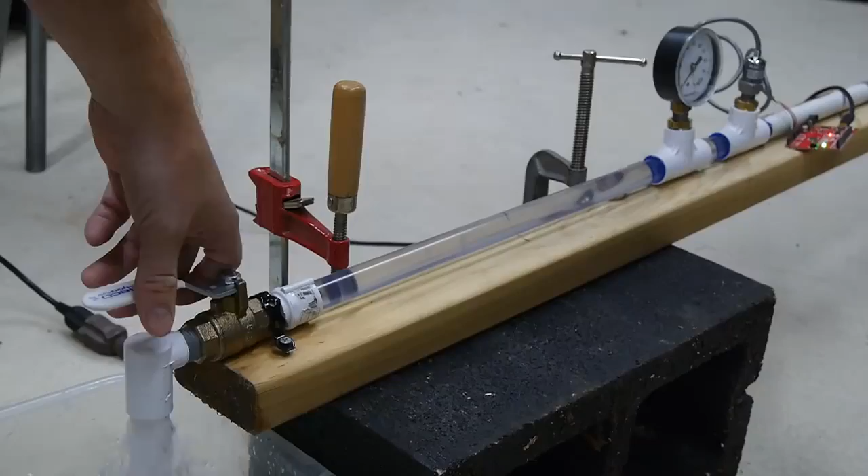It's easy to forget how heavy water is since we hardly ever carry more than a few ounces at a time. But if you add up all the water in the pipelines of your city, or even just the pipes in your house, it makes up quite a bit of mass. And when all that water is moving through a pipe, it has quite a bit of momentum.

If you suddenly stop that movement, for example by quickly closing a valve, all that momentum has nowhere to go. Since water isn't compressible or springy, it can't soften the blow. You might as well be slamming concrete into the back of the valve and the walls of your pipe. Instead of being absorbed, that sudden change in momentum creates a spike in pressure that travels as a shockwave through the pipe.

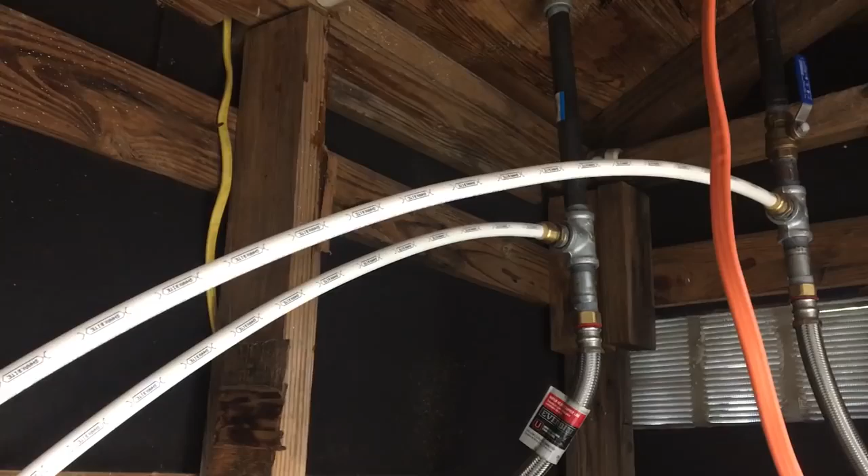Sometimes you'll even hear this shockwave as banging in your walls when you close a faucet or run the washing machine, hence the superhero-esque nickname, water hammer. Banging pipes inside your walls can sound a bit spooky, but for large diameter pipelines that can be hundreds of kilometers long, that surge in pressure from a change in momentum can cause major damage.

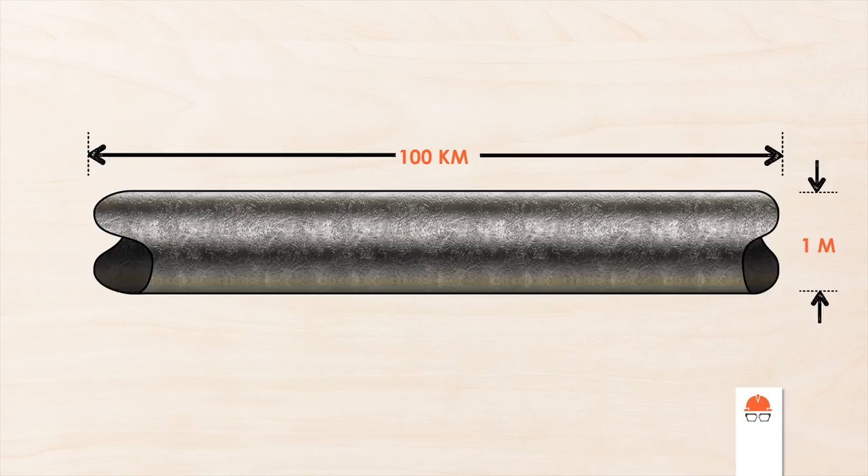Let's do a quick calculation. If you have a pipeline carrying water that is 1 meter in diameter and runs for 100 kilometers, a fairly average sized pipeline, the mass of water in the pipe is about 80 million kilograms. That's a lot of kilograms. In fact, it's the equivalent of about 10 freight trains.

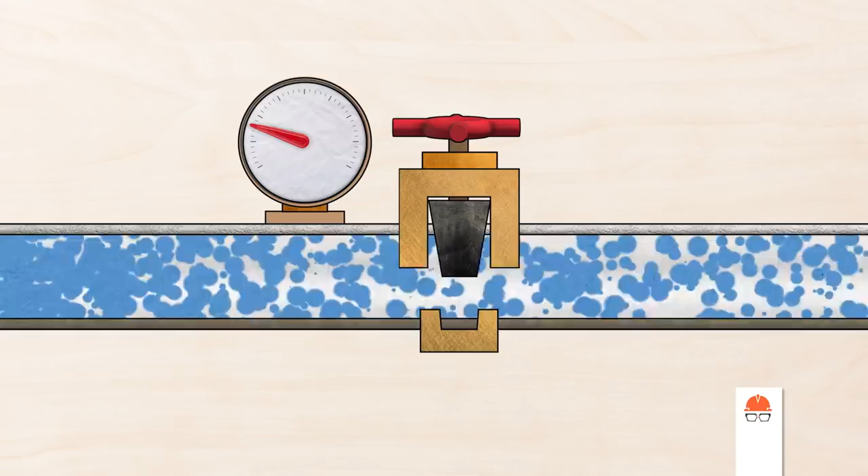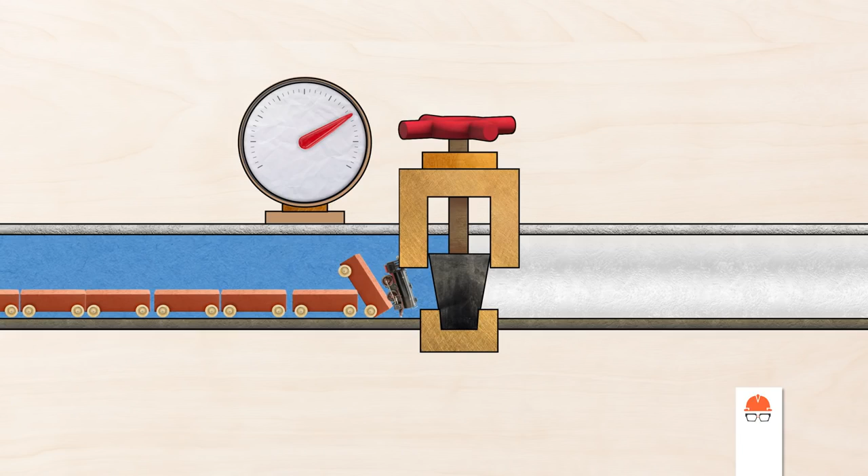Imagine you're an operator at the end of this pipeline in charge of closing a valve. If you close it quickly, you've essentially slammed those trains into a brick wall, and the pressure spike that results from such a sudden change in momentum can rupture the pipe or cause serious damage to other parts of the system. There's actually another term for when a large spike in pressure ruptures a sealed container, a bomb. And water hammer can be equally as dangerous.

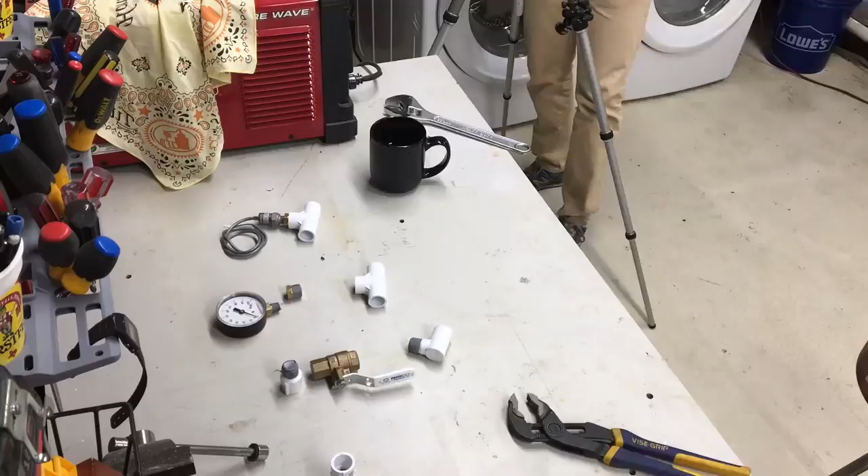So how do engineers design pipe systems to avoid this condition? Let's build a model pipeline and find out. Here's my setup. I've got about 100 feet or 30 meters of PVC pipe connected to the water on one end and a valve on the other. I also have an analog and digital gauge so we can see how the pressure changes, and a clear section of pipe in case anything exciting happens in there. I mean civil engineering exciting, not like actual exciting.

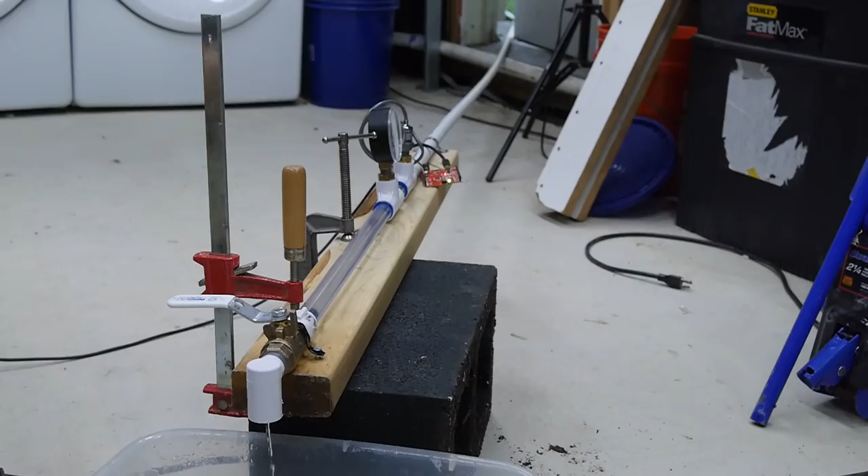Watch what happens when I close this valve. It doesn't look like much from the outside, but look at the data from the pressure gauge. The pressure spikes to over 2,000 kilopascals, or about 300 psi. That's 5 times the static water pressure. It's not enough to break the pipe, but way more than enough to break this pressure gauge.

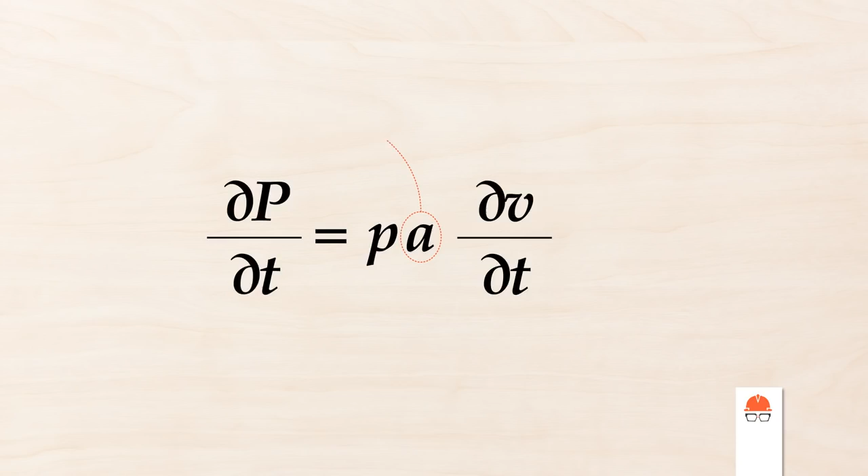We're not going to do any calculus here, but the terms of this equation show the parameters that can be adjusted to dial back these damaging forces. And the first one is obvious. It's the speed at which the fluid is moving through the pipe. Reducing this is one of the simplest ways to reduce the effect of water hammer.

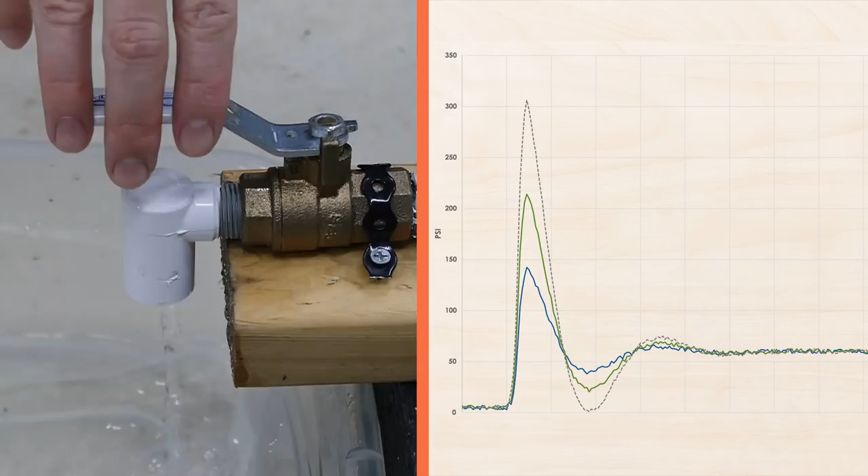Velocity is a function of the flow rate and the size of the pipe. If you're designing a pipeline, the flow rate might be fixed so you can increase the size of your pipe to reduce the velocity. A smaller pipe may be less expensive, but the flow velocity will be higher, which may cause issues with water hammer. In this case, my pipe size is fixed, but I can reduce the flow rate to limit the velocity. Each time I reduce the velocity and close the valve, the resulting spike in pressure decreases.

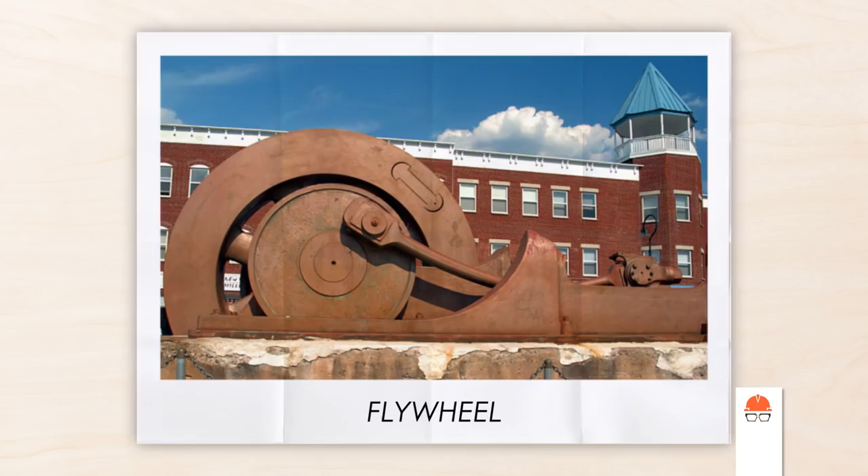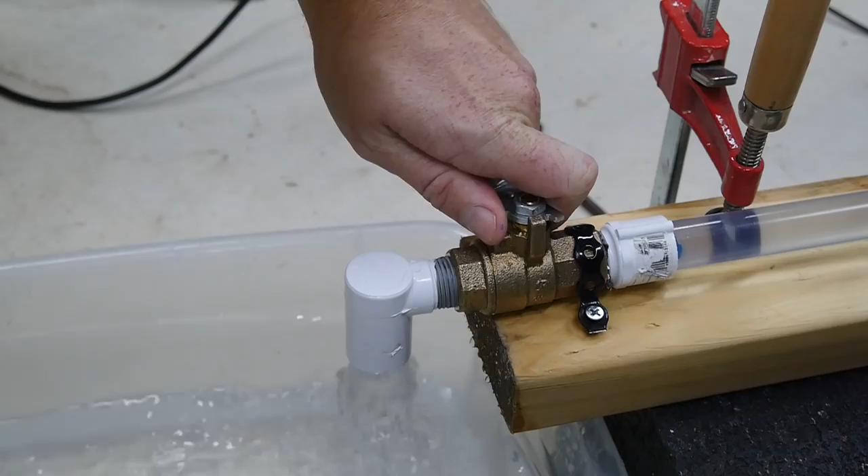Next, you can increase the time over which the change in momentum occurs. One common example of this is adding flywheels to pumps so they spin down more slowly rather than stopping suddenly. Another example is just to close valves more slowly. If I gently shut the valve rather than allowing it to snap shut, the pressure changes are more subtle.

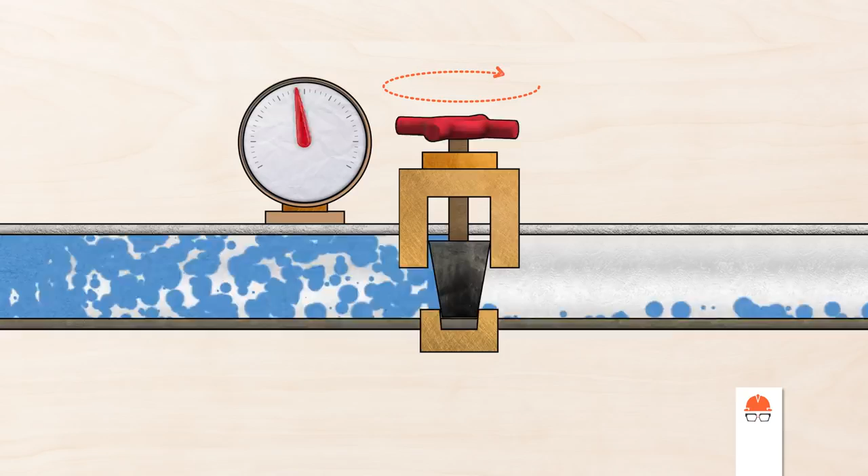On large pipelines, engineers not only design the components, but develop the requirements for operation of the equipment. This will almost always include rules for how quickly valves can be opened or closed to avoid issues with water hammer. The final parameter we can adjust is the speed of sound through the fluid, also known as wave celerity.

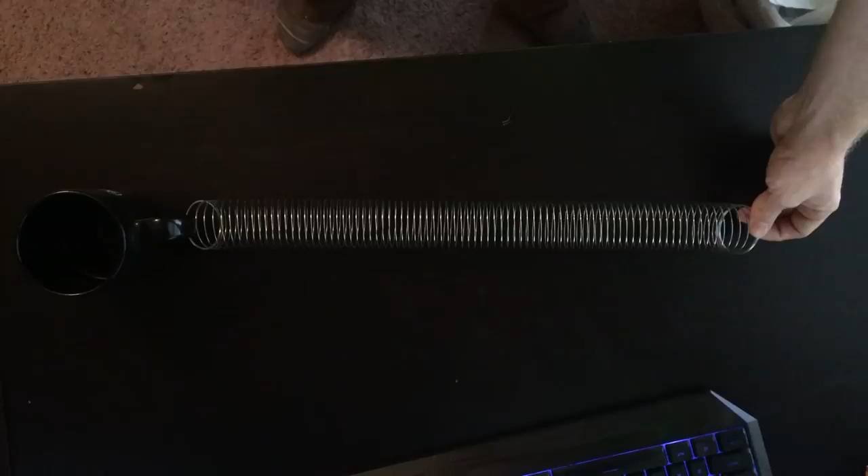This describes how quickly a pressure wave can propagate through the pipe. The wave celerity is an indirect measure of the elasticity of the system, and it can depend on compressibility of the fluid, the material of the pipe, and whether or not it's buried in the ground. In a very rigid system, pressure waves can reflect easily without much attenuation.

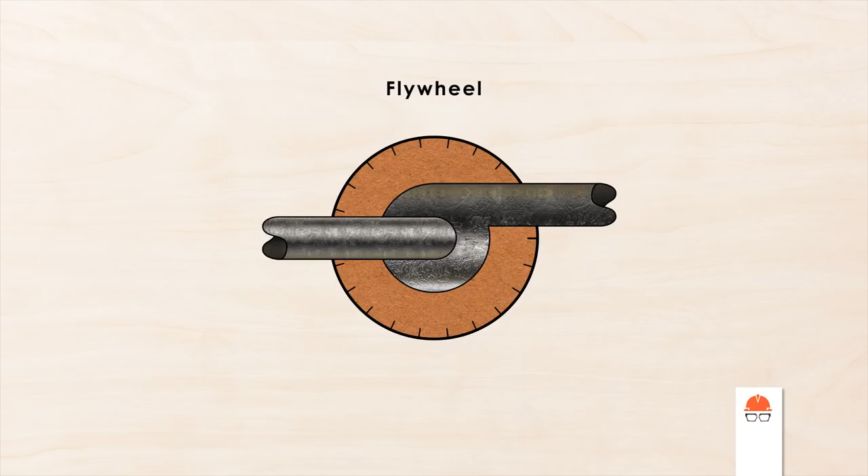I've got flexible PVC pipe sitting on the ground free to move, which is already helping reduce the magnitude of the water hammer. I can increase the flexibility even more by adding an anti-surge device. This has an air bladder that can absorb some of the shock and reduce the pressure spike even further. Anti-surge devices are very common in pipe systems, and they can be as simple as spring-loaded valves that open up if the pressure gets too high.

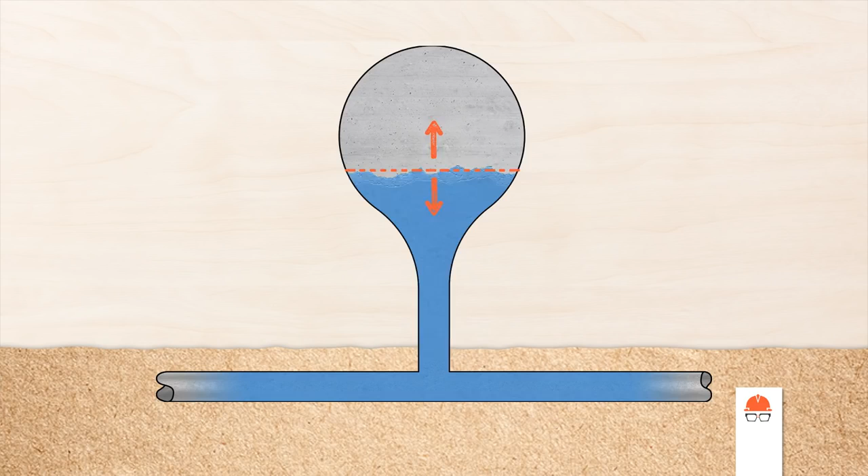In water distribution systems for urban areas, water towers help with surge control by allowing the free surface to move up and down, absorbing sudden changes in pressure. Plumbing is one of the under-acknowledged innovations that has made our modern society possible. But when you harness the power of water by putting it in pipes, it's easy to forget about that power altogether. Water can be as hard as concrete when confined, and if you bang two hard things together, eventually something's gonna break.

If you're an engineer, your job is to make sure it's not the expensive infrastructure you design. Part of that means being able to predict surges in pressure due to water hammer and design systems that can mitigate any potential damage that might result.